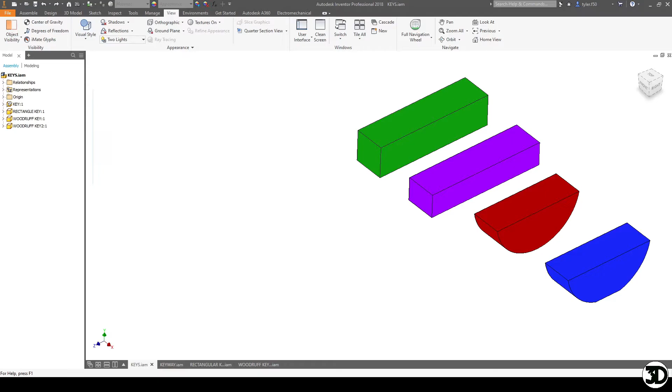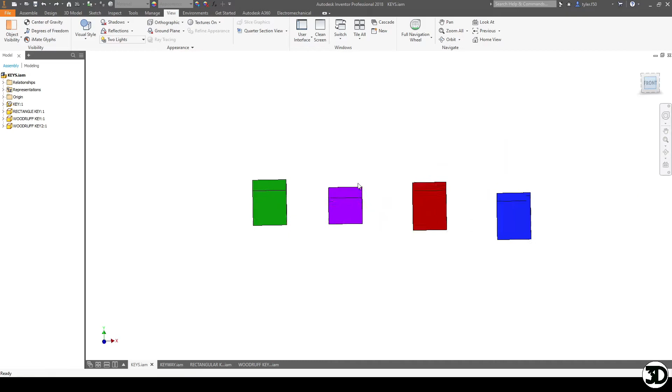In this video, we're going to discuss the most common keys used for keyways. You can see there's 4 styles here, but there's actually only 3. One's just a small variant, which is the blue one here. So the first one you can see is actually the same one from the first video, which is a square keyway. The second one you can see is a rectangular one, so it has a height that's shortened.

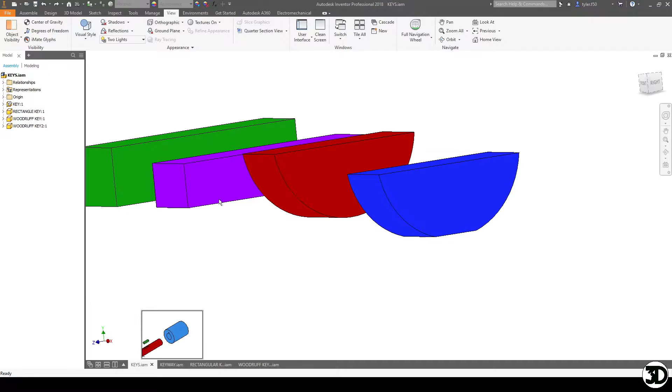And then the Woodruff keys are using a radius. And then the variant is just having a flat. And this is just, again, something that's preferential. Typically, in the real world, you're normally going to have the rounded version. But for 3D printing, you have multiple options. So let's take a look at what a square keyway is and some of its benefits.

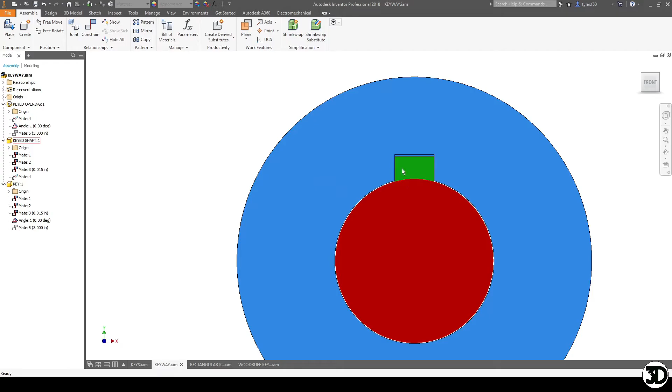So here you can see the square keyway from the previous video. We're not going to go too much into detail of that, but essentially, this is just the most commonly used style of keyways, and again it just fits in there. And you'll notice that this one has a lot of material that's going to be cut away from both the shaft and the portion it fits into.

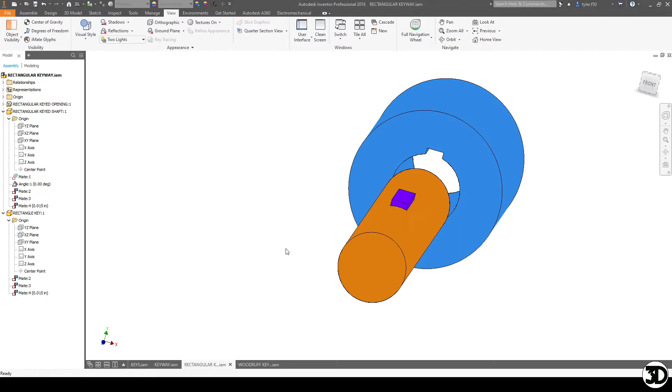So if you are tighter on space, that's where the rectangular keyway comes into place. So let's take a gander at what that one looks like and take a side-by-side comparison. So here you can see that it's a very similar idea for setup. The keyways look almost identical outside of the height. So if we put this together, you'll see that it fits in exactly the same, but your height is increasingly smaller. So you can see here that it's cut it by quite a bit.

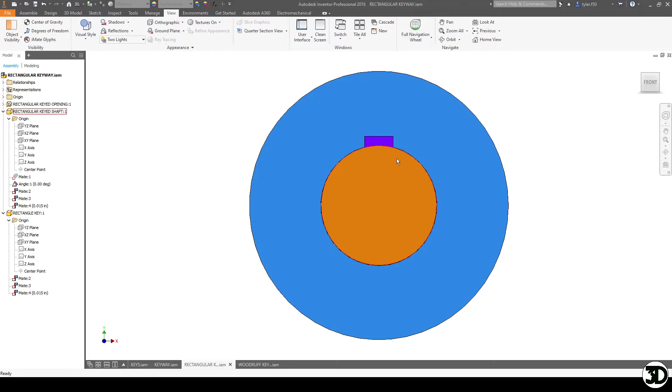And the benefit for this is if you have a spot that's going to be a tighter fit for this keyway, and you need that extra material from the top of the keyway to the top of the shaft or whatever else it's connected to, a rectangular keyway is more ideal. So that's the great thing about having that style. Let's take a look at a Woodruff key, which is a very different style altogether, and go from there.

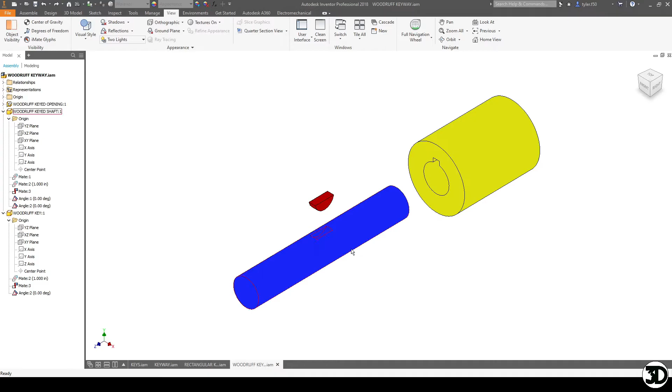So here you can see the Woodruff key. It is a very unique keyway compared to the other two, and I would recommend this one more for a fun style keyway, something that's not going to be utilized for mechanical operation on a frequent basis. So definitely worth something for a toy or a puzzle box of some sort. So essentially this sits tangentially in this groove that's in the shaft, and we're going to do a quick side view of that just so you can see what that looks like.

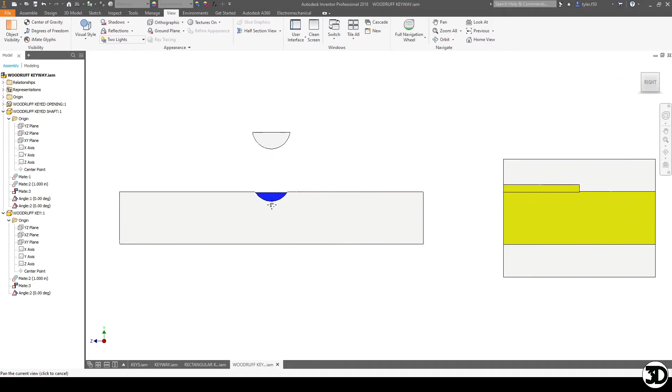And what you'll notice is the keyway itself fits tangentially in this spot. So if I were to bring it down, it kind of sits on there. But the interesting thing with the keyway is it could actually rotate tangentially on it. So it will take some finesse when you're putting this together. Again, that's why it's so fun to have for, let's say, a puzzle box.

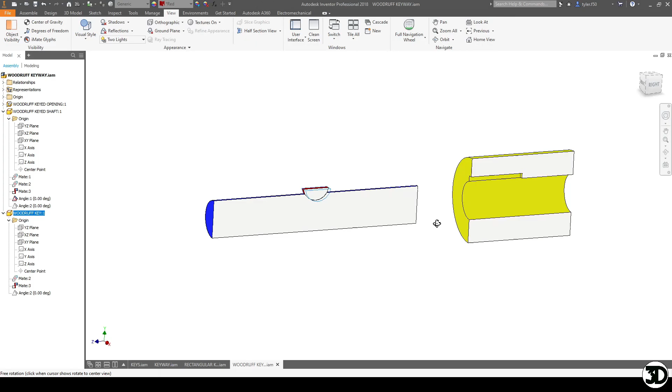And essentially the way that it would work is once it's flush, you can see that it'll slide in place and it'll stay in place. So it'll be able to actuate something, just not on a constant basis. So I wouldn't use the Woodruff key for a gear that you're going to be spinning all the time.

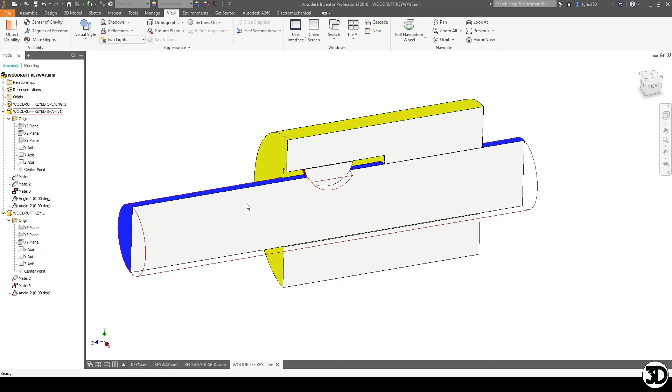But the nice thing is that when this comes apart, this is easy to take out and essentially have hidden, let's say in a puzzle box, or you can put it together on a frequent basis for a toy. And that's what's really nice with Woodruff keys. They are most commonly used for woodworking, but for 3D printing you can definitely utilize them as well. So hopefully that helps.